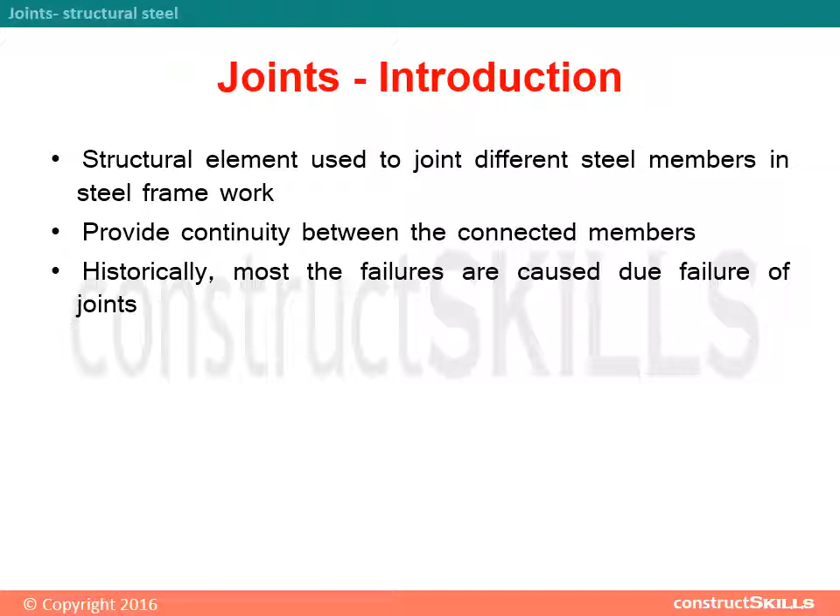A joint is a structural element used to join different steel members in a steel framework. It provides continuity between the connected members. Historically, most failures are caused due to failure of joints.

The selection of a joint depends upon the type of loading, strength and stiffness, economy, and difficulty or ease of erection.

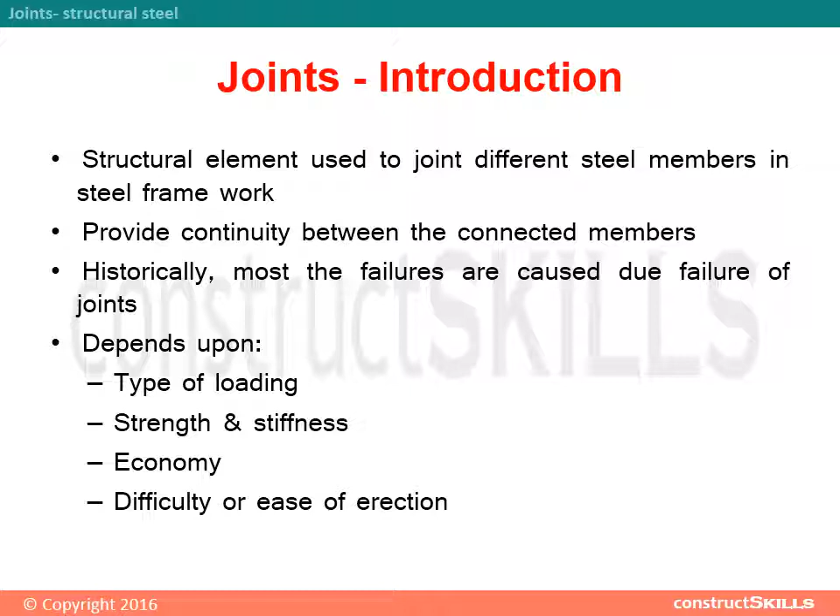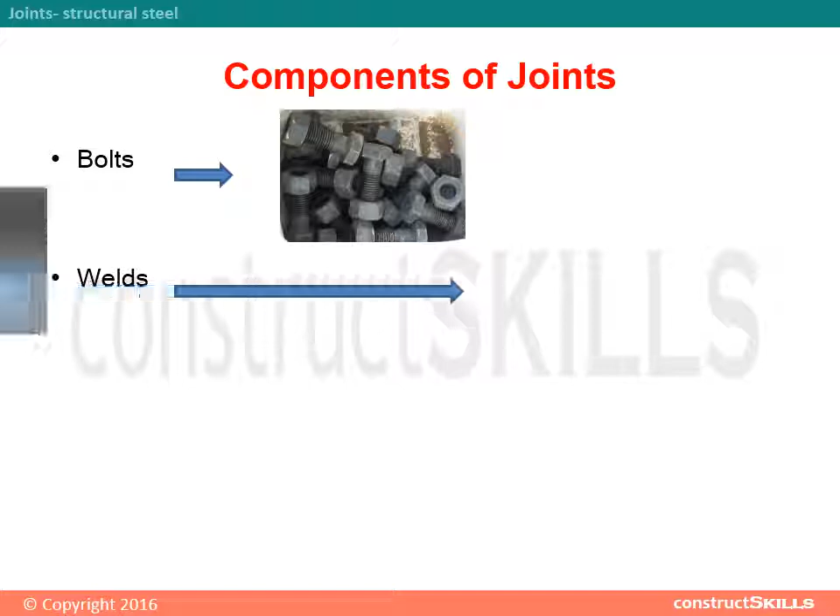Components of joints include bolts, welds, connecting plates, and connecting angles.

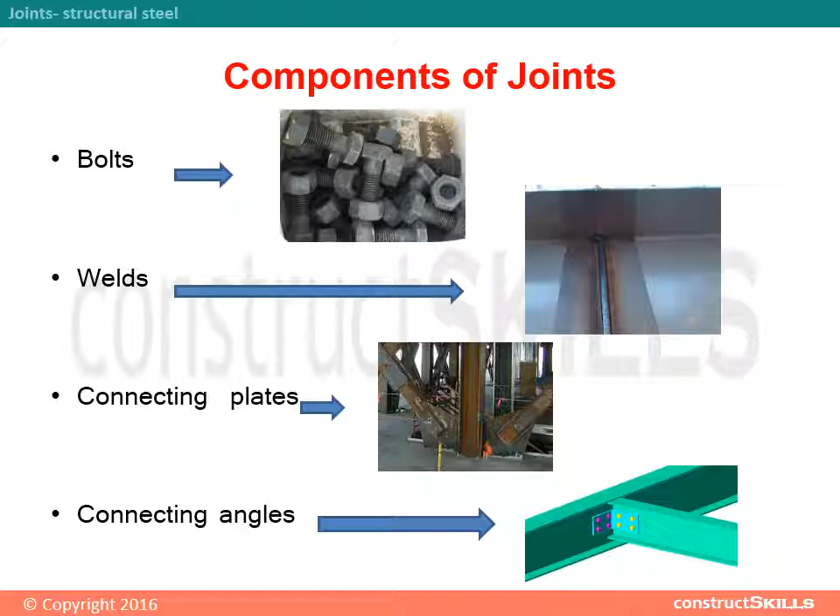Classification of joints. There are 4 types of joints: first, on the basis of joining medium; second, according to type of internal forces; third, according to the type of structural element; and last, according to the type of member joined.

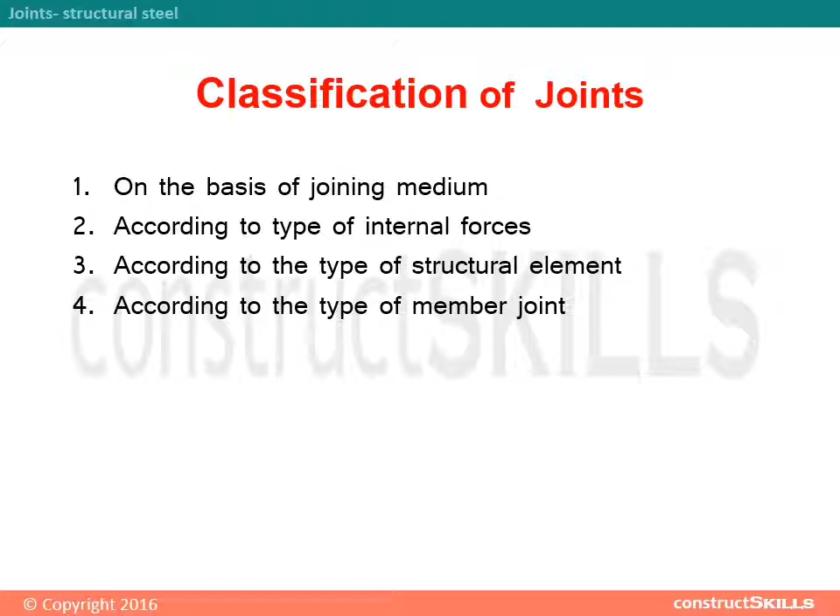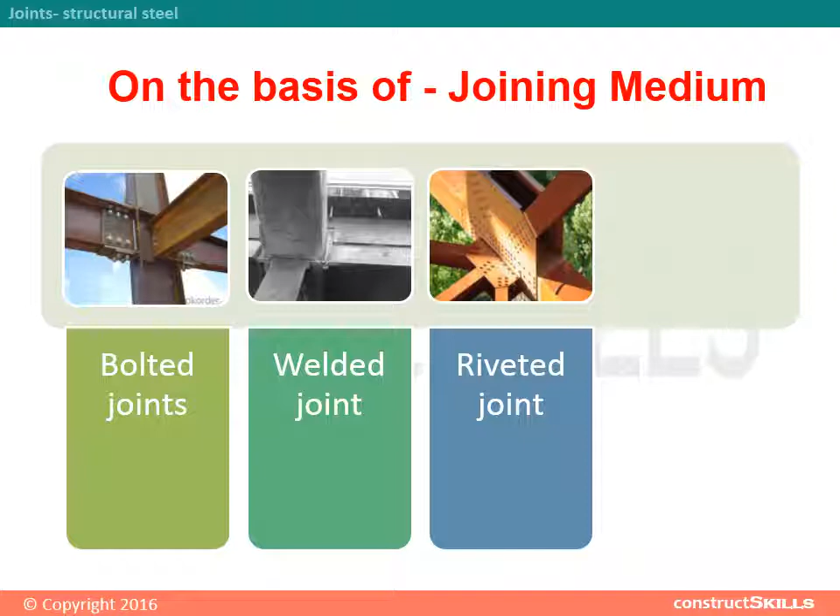First, on the basis of joining medium: bolted joints, welded joint, riveted joint, and bolted and welded joint.

Bolted joints. These types of joints are fastened together by bolts. In this joint, bolts may be loaded in shear, tension, or both.

Types of bolts. There are 2 types of bolts: first is bearing type bolts, and another is high strength friction grip bolts.

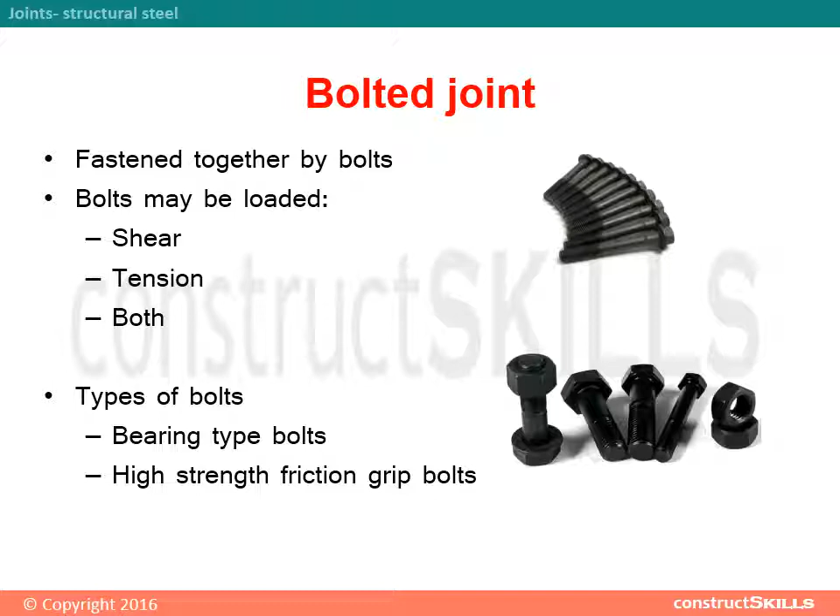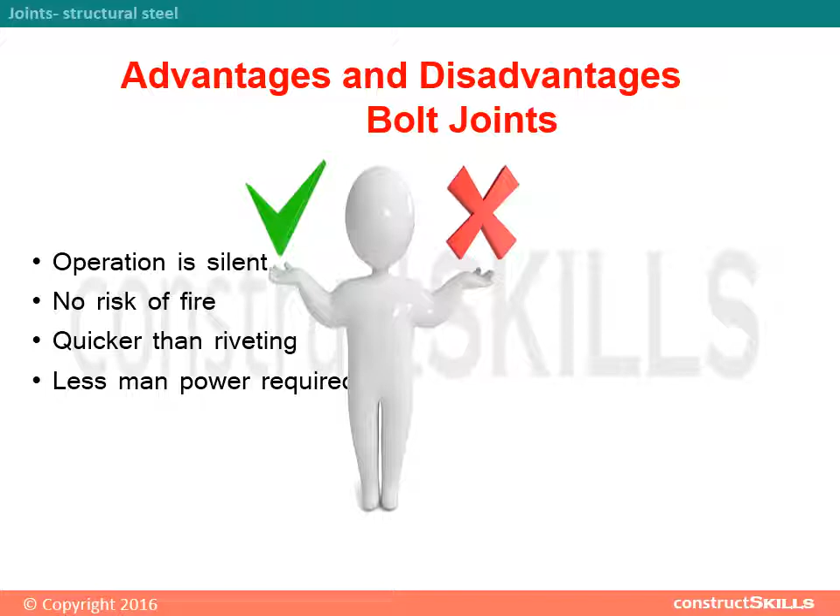Advantages and disadvantages of bolted joints. Advantages: 1. Operation is silent. 2. No risk of fire. 3. Quicker than riveting. 4. Less manpower required.

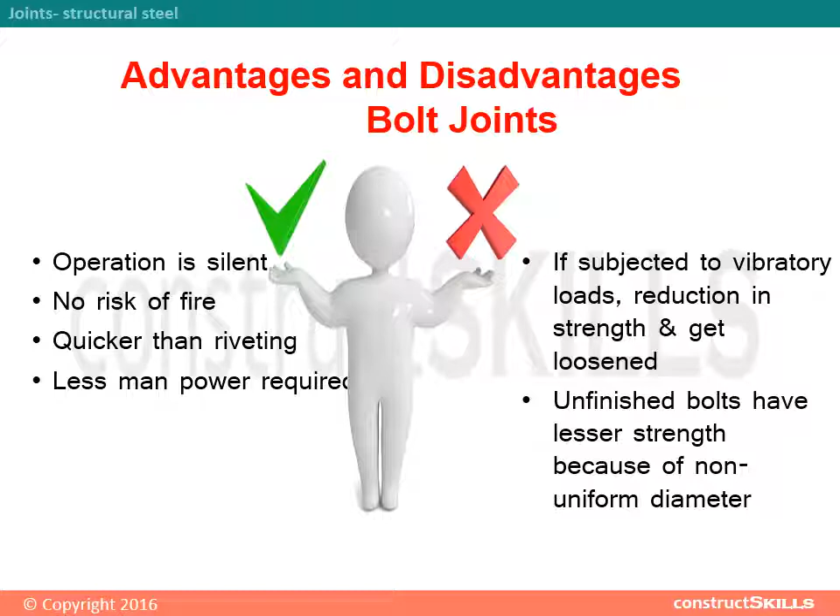Disadvantages: 1. If these joints are subjected to vibratory loads, it causes reduction in strength and they get loosened. 2. Unfinished bolts have lesser strength because of non-uniform diameter.

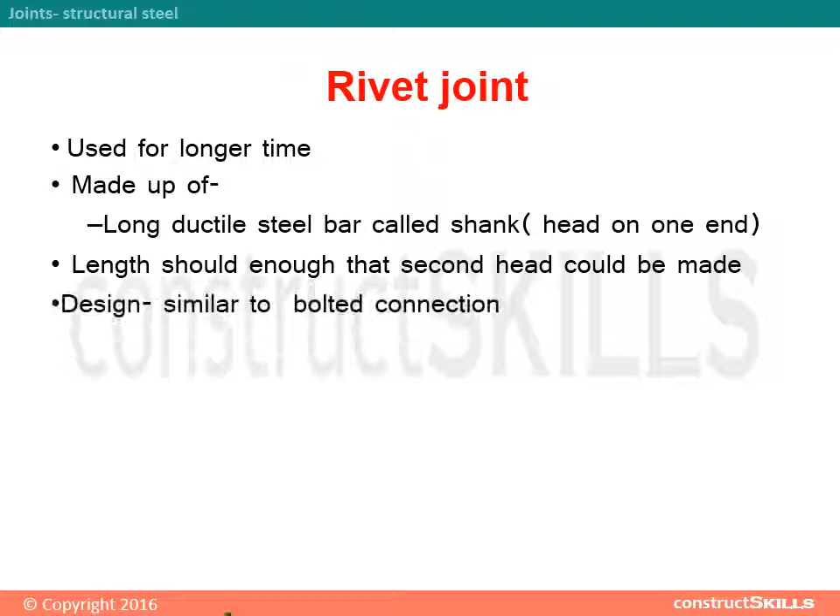Riveted joint. It has been used for a longer time. It's made up of a long ductile steel bar called a shank, with a head on one end. Its length should be enough that a second head could be made. Its design is similar to a bolted connection.

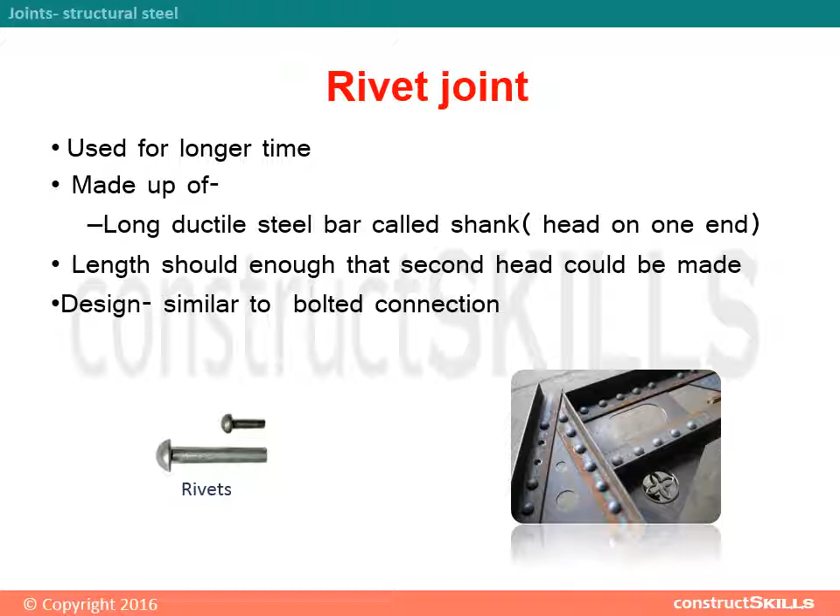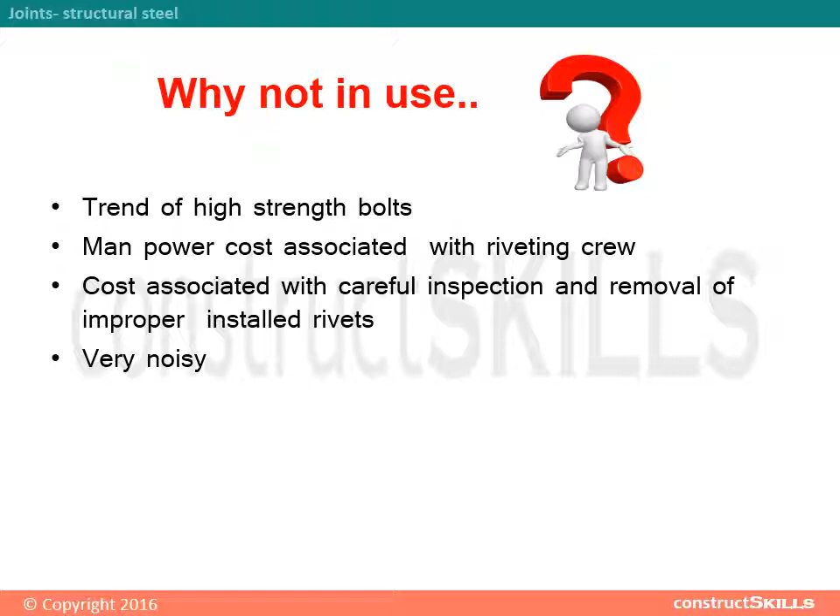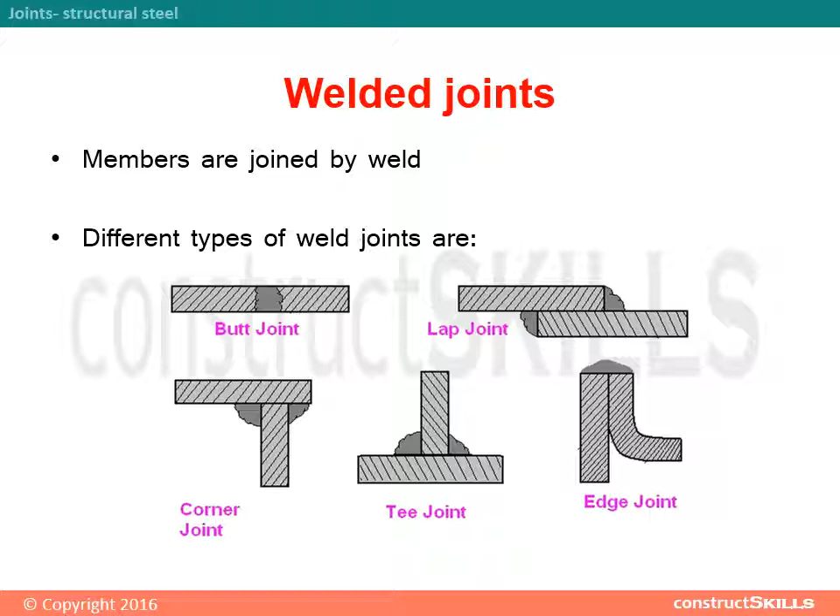Welded joint. In this joint, members are joined by weld. There are different types of weld joints: butt joint, lap joint, corner joint, T-joint, and edge joint.

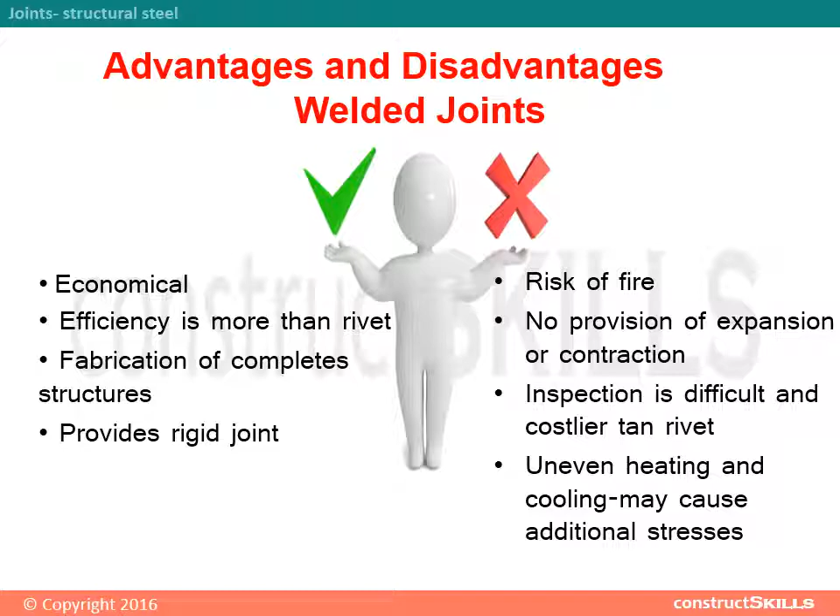Disadvantages are: 1. Risk of fire. 2. There is no provision for expansion or contraction. 3. Its inspection is difficult and costlier than rivets. 4. Uneven heating and cooling may cause additional stresses.

Bolted and welded joint. Most joints are shop welded and field bolted type. They are more cost effective, with better strength and ductility characteristics than fully welded joints.

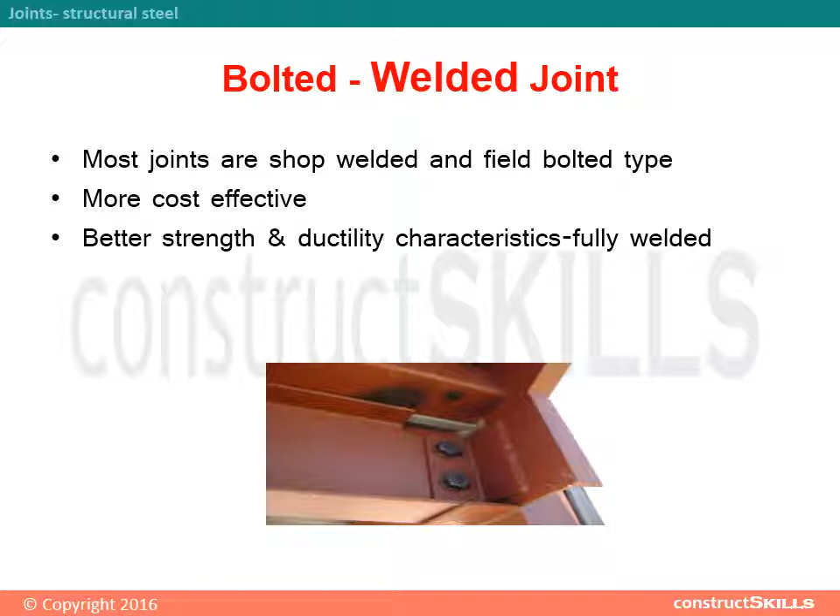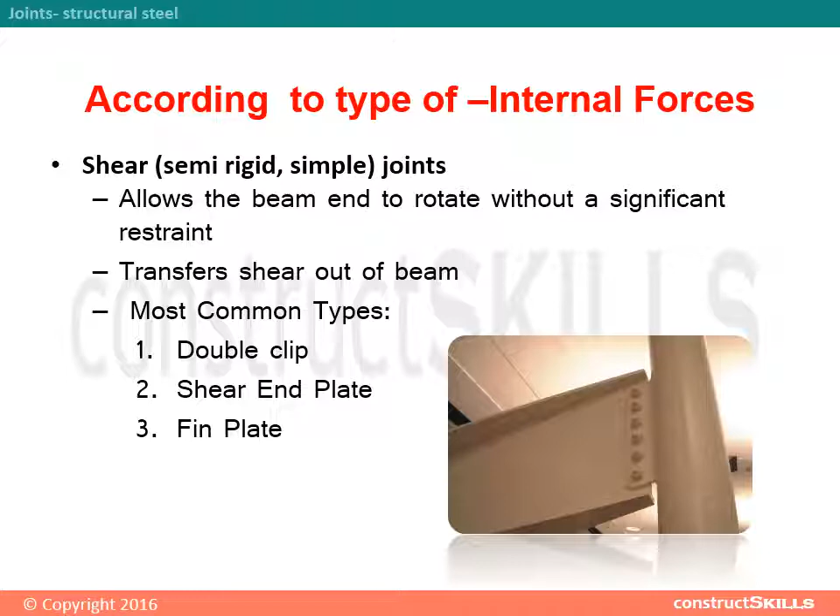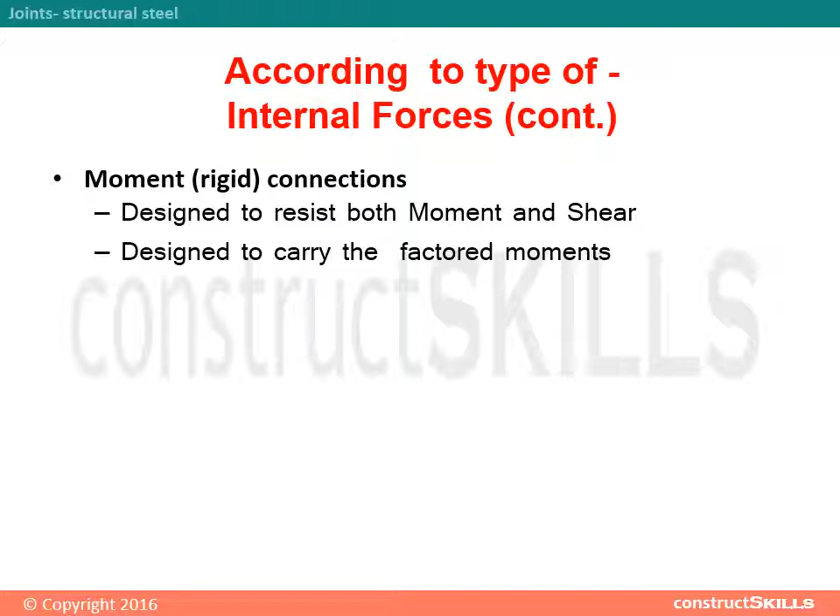Moment, or rigid, connections are designed to resist both moment and shear. They are designed to carry the factored moments. The principal reason is that buildings have to resist the effect of lateral forces such as wind and earthquake.

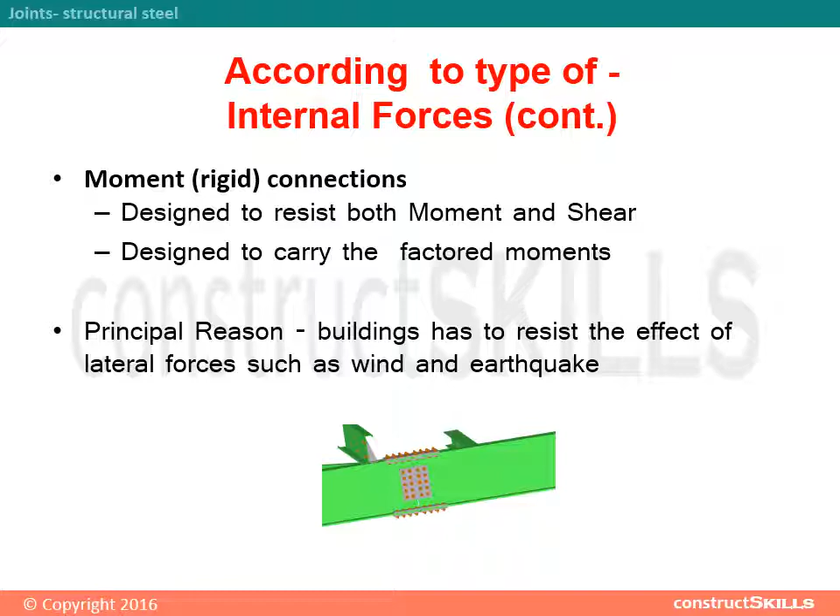According to the type of structural element: single plate angle connections, double web angle connections, top and seated angle connections, and seated beam connections.

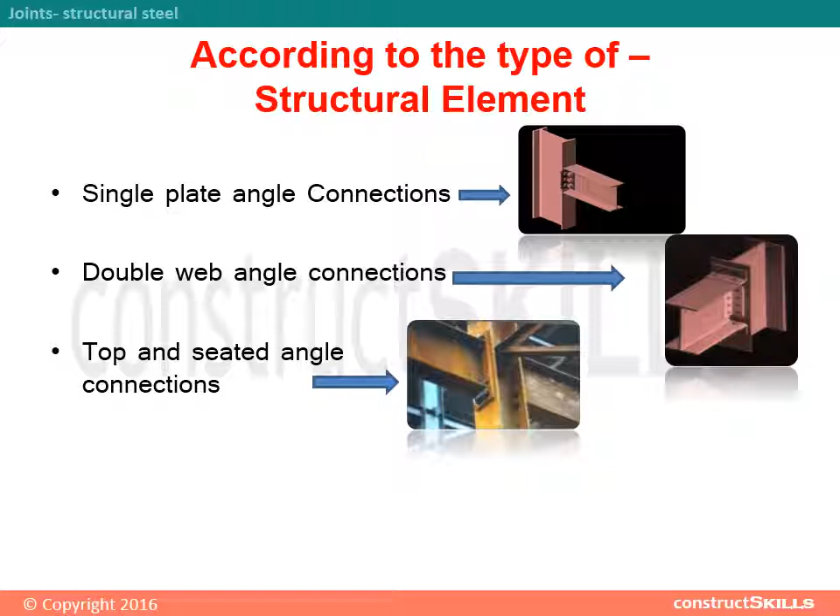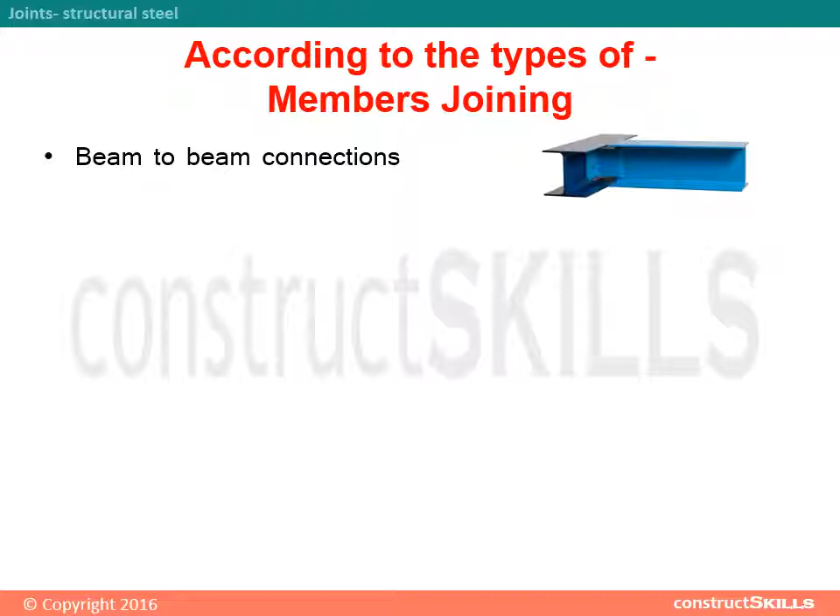According to the types of members joining: beam-to-beam connections, column-to-column connections (column splices), beam-to-column connections, and column base plate connections.